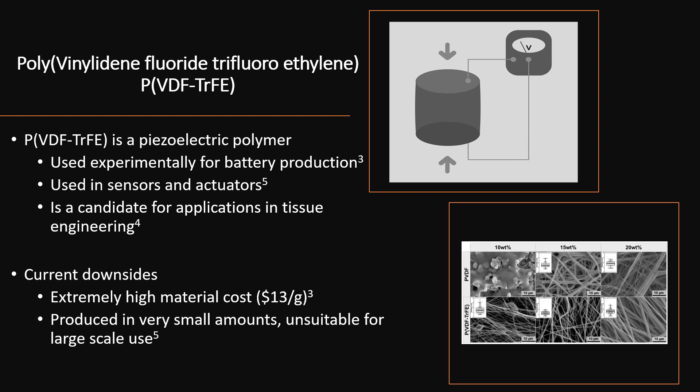There are some downsides with this polymer, such as its extremely high material cost. Right now it costs about $13 a gram, and it's also sold by the gram, which makes it unsuitable for, for example, electric vehicle production. So we designed a process to solve these downsides mentioned previously.

Our process aims to produce 300,000 pounds per year of 70/30 PVDF-TrFE in both film and powder forms, with the objective of supplying the demand in battery market materials for electric vehicles and medical research needs, with the end goal of reducing current market price for the product and increasing supply.

Now, the way we did this is we developed a commercial process design by upscaling a current laboratory procedure, which also includes process safety and controls. Now, in the next section, we're going to briefly walk you through the chemistry involved in the process of synthesizing this polymer with Mohammed.

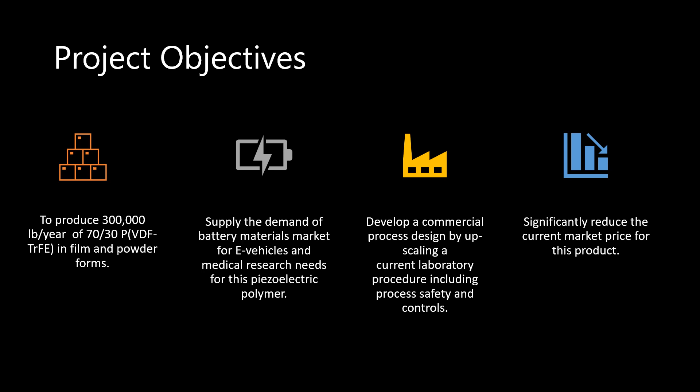So let's go ahead and take a deeper dive into the production chemistry of PVDF-TrFE from vinylidene fluoride and trifluoroethylene. The first step involves the reaction between VDF and TrFE in the presence of calcium hydroxide and ethyl hydroxyethyl ether, which in our case is our commercial Bermocoll, as a stabilizer. This process will be our copolymerization and will result in the formation of a copolymer of both VDF and TrFE.

The copolymerization reaction can be initiated by various methods, such as chemical initiators, radiation, or heat. In this case, our calcium hydroxide will act as a base to initiate the reaction between VDF and TrFE, while our Bermocoll just stabilizes the resulting copolymer. Our calcium hydroxide will not be a typical initiator in the sense that it will not form any free radicals or any other reactive species that initiate the reaction.

However, what calcium hydroxide will do is initiate the copolymerization reaction between both VDF and TrFE by deprotonating the acidic hydrogen atoms on the carbon atoms of VDF and TrFE monomers. This reaction will generate carbanions, which are highly unstable, and they will attack the electrophilic double bond of the neighboring monomer, leading to chain growth and propagation.

The use of calcium hydroxide as a base initiator is a common method for initiating polymerization for reactions that usually involve monomers with acidic hydrogen atoms, such as in our case VDF and TrFE. The next step will be the functionalization of the copolymer using ethyl chloroformate and diethyl carbonate. The ethyl chloroformate will react with the hydroxyl groups present in the Bermocoll to form carbamates, which will act as nucleophiles. These nucleophiles will attack the carbonyl groups of the diethyl carbonate, resulting in the formation of ester linkages between the Bermocoll and the copolymer.

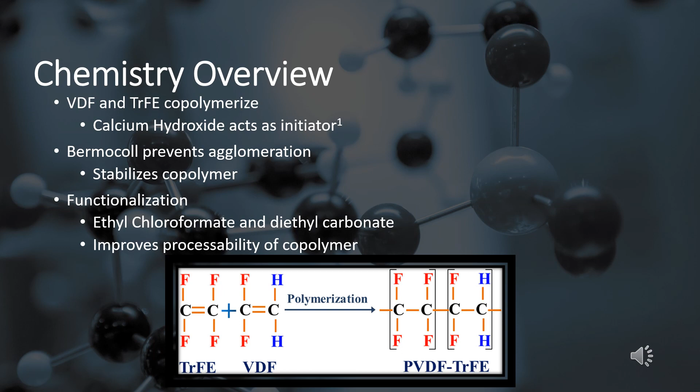The resulting polymer becomes more compatible with solvents and other materials. As a result, this functionalized polymer is more soluble in a wider range of solvents and can be processed into various forms more easily, which will assist us in our final endeavors before commercializing. I'll walk us through the process overview.

Alright, here's our overall plant breakdown of the processes involved to produce this polymer. The raw materials include demineralized water and go into copolymerization in a reactor, and tower water is supplied to that reactor for temperature control. The crude product enters the diafiltration system along with demineralized water to remove impurities from the product. Then the product leaves the diafiltration process and flows through a dryer with compressed air to remove moisture. The product at that point will have 99.9% purity and become a solid cake.

After purifying, this cake product will be milled to produce PVDF-TrFE powder, and 10% of that powder will be transferred to an extruder to produce PVDF-TrFE film. The waste involved from all these processes will be discussed as we go into details through the equipment used in each process on the following slides.

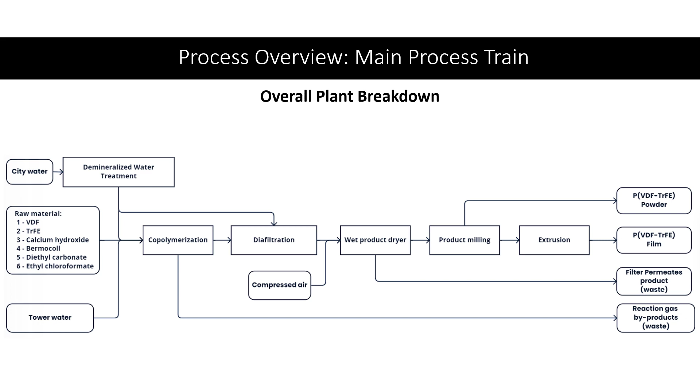There are four main sections in the plant. In blue is the demineralized water system, where demineralized water is produced to supply the synthesis section in purple and the purification section in green. In purple is the synthesis section where the crude product exits as a slurry, in green the purification section where the slurry is washed and dried, and finally in orange the solid processing section where we turn the product into powder and film.

And here is a fluid flow demonstration. The raw material enters the jacketed reactor 2 and yields 90% PVDF-TrFE. Then the crude product, which is a slurry, will go to diafiltration where it will be washed 7 times to produce 99.9% pure product. The fluid then will be transported to a dryer where the moisture will be removed to prepare for milling.

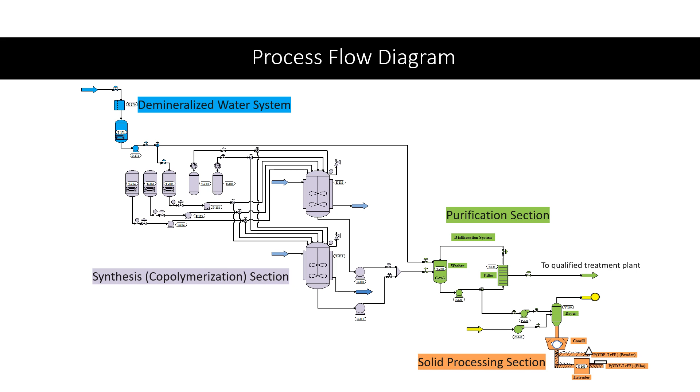And now from the dryer to the co-mill, the product will become powder. 10% of that powder will be transferred via conveyor belts to an extruder to produce the films from this product. Let's take a closer look at each section.

This section of the plant includes a unit that is pre-built and fully equipped with the necessary equipment to produce demineralized water from city water. The unit can produce up to 10 gallons per minute, which is stored in an intermediate tank to supply the DI water as a solvent for the reactor, and the very large amount required for the diafiltration system. The DI water is pumped using a centrifugal pump, and a possible improvement for this section of the plant is to have another tank for the diafiltration system in case of producing much larger quantities than currently issued.

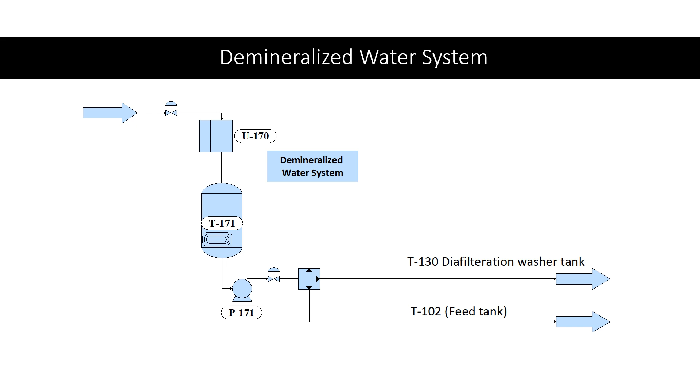Let's talk about the synthesis section. There are 3 tanks containing the reagents along with the demineralized water, the solvent. These tanks have heating coils inside of them, whose purpose is to heat the reagents and the solvent to 105 Fahrenheit prior to feeding the reactors. One of the tanks will be fed demineralized water from the demineralized water system, the blue arrow.

That raw material tank will contain calcium hydroxide and Bermocoll, as these two materials are solids and there are no significant hazards from mixing them with demineralized water prior to feeding into the reactors. In addition to that, the reactors cannot be opened to pour these solid materials, as the reactor needs to be pressurized to complete the reaction.

Along with these tanks, we have two gas phase reactants, VDF and TrFE. The pressure of these feed gas canisters is controlled using regulators installed and rated for the reaction requirement. The raw materials will enter one of the two jacketed continuously stirred batch reactors. The reaction takes around 3 hours to complete, and the reactors will operate staggered in 1.5 hour phases to reduce downtime in the purification section and have a semi-continuous process.

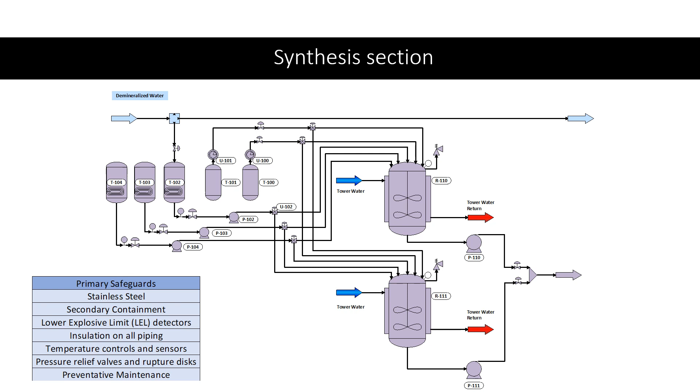The jacket around these reactors will be filled with tower water to control the reactor temperature, as we previously mentioned that the reaction is extremely exothermic, and the temperature can reach around 70 Celsius. Also, the reactors are designed to withstand over 1000 psig, as the laboratory procedure mentioned events of high pressure during the copolymerization. The crude product will be a slurry and will be pumped to the purification section. The primary safeguards like temperature control and sensors are listed on the left.

I will be discussing the purification section of the plant. Once the crude product comes out of the reactor, it will be sent to a diafiltration system where we'll be purifying our product to remove all the impurities. The system consists of a washer tank equipped with a mixer. The fluid is pumped using a positive displacement pump, as the fluid will become viscous at this stage of the process due to the nature of the polymer in water, along with the dispersion of Bermocoll.

The solvent used is DI water, supplied from the DI water system that we talked about earlier. An amount equal to the crude product is fed to the system. However, the total amount added is equal to 7 times the amount of crude product. This will dissolve the impurities, including the calcium hydroxide and other materials that participated in the reaction.

The mixture will then be transported to an ultrafiltration membrane to separate the dissolved impurities, along with a considerable amount of DI water, as the permeate fluid, and the pure product will remain in the retentate, which will flow back to the washer tank with a fresh batch of DI water. This process will have 7 washing cycles to obtain a 99.9% pure PVDF-TrFE polymer.

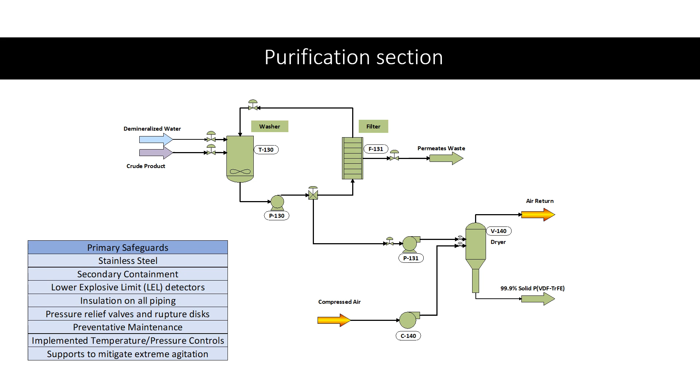Moving on to the solid processing section. So exiting the dryer, as we said earlier, is a 99.9% pure solid PVDF-TrFE copolymer agglomerate. And this agglomerate, the dried copolymer, will be sent to the conical mill via conveyor belt. The conical mill will mill the solid copolymer to achieve the deagglomeration and the particle size reduction in order to later extrude this powder into a film.

The co-mill will have a wide selection of screen sizes and rotor configurations, which will enable us to achieve the desired particle size distribution. The time to mill the 51-pound batch of dried copolymer will be approximately 15 minutes. 90% of this milled powder product will be sent via powder bins on a conveyor belt to be stored as a final product, while 10% of the milled powder will be conveyed to a film extruder.

When the milled powder is fed into the extruder, which as you can see is the last unit operation in the plant, it is melted through a heated barrel and then subjected to high pressure and shear forces, which will homogenize the material. The molten polymer is then directed through a narrow die, which will shape the polymer into a thin film. And the film is finally quenched and solidified and then cut into sheets as the final product. This extrusion process will take approximately 15 minutes to complete.

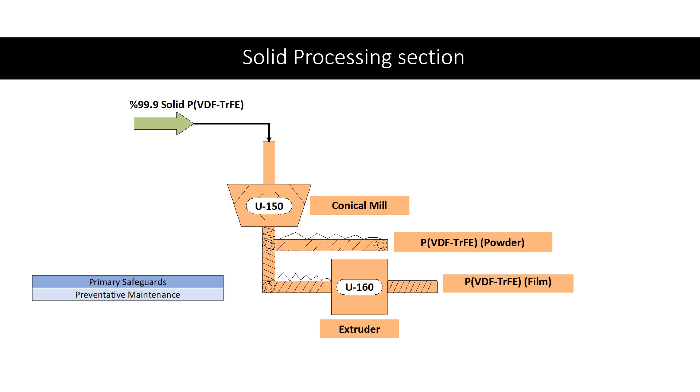And now we'll be talking about process safety, which will be introduced by Muhammad. So the table below showcases a summary of the compounds used alongside their respective health, fire, and reactivity hazards. The team conducted a process hazard analysis, or PHA, utilizing the what-if methodology to guide the implementation of any controls and safeguards. The controls and safeguards were showcased during each respective section as seen beforehand. The biggest open point as a result of this what-if analysis was the quantification of the amount of byproducts, both gaseous and liquid, formed as a result of the reaction. We will go more in depth on that avenue in the environmental performance section.

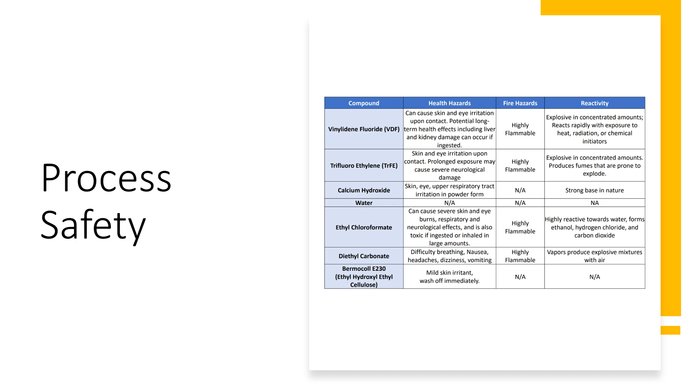As far as other recommendations go, the team recommends the application of a secondary temperature control system in both the reactor and the dryer. What we believe this will do is serve as an additional layer of protection against subtle spikes in temperature that may introduce a risk of fire or explosion. This will also be compounded with the safety factor that would come alongside a better understanding of the kinetics of the actual reaction. The team will also recommend the implementation of external protective barriers around pipes and areas of potential physical external damage. Finally, a robust preventative maintenance plan will be implemented for each node in the plant. The maintenance plan is to be performed consistently as well as timely.

A closer look at the environmental performance of our process. The biggest open points as far as environmental performance is concerned are the release of trace amounts of diethyl carbonate as well as ethyl chloroformate. The team found out that ethyl chloroformate decomposes in the presence of sunlight to produce acid fumes, while diethyl carbonate still remains an open point. The team has been considering the use of flares, or small-scale flares, in order to break down diethyl carbonate. This will also break down ethyl chloroformate, as they both break down in the presence of heat.

The table on the top also showcases the effect on water life if exposed to any of the chemicals. That, as well as the waste stream analysis, was pulled from an estimate derived from ChemCAD and remains as is, a very rough estimate. A further analysis is recommended in order to determine a better approximation of the impact. But as it currently remains, there is a low contribution of the waste stream towards environmental impact for water as well as global warming, smog formation, and acid rain.

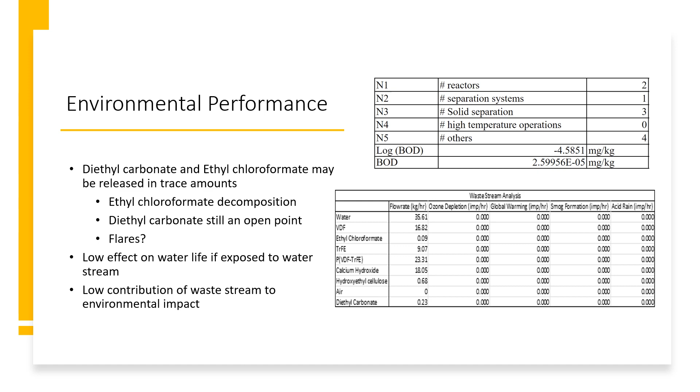Here is a summary of all the other regulations considered so far. The biggest regulation that led to a safety recommendation can be showcased in section 1503.2 of the Greater Cincinnati MSD regulation. This led to the installation of lower explosive limit, or LEL, sensors for the detection of volatile compounds. This proved a crucial safeguard for operators and the process, and its impact was evaluated and can be showcased in our PHA report.

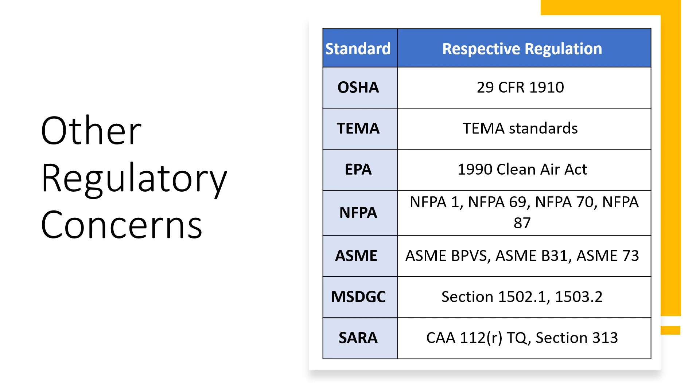So regarding the significant technology risks, the primary risk associated with this project is the adaptation and scale-up of a lab polymerization procedure. We don't have a perfect understanding of the kinetics of the reaction, but the synthesis of the PVDF-TrFE is currently only done at a laboratory scale, as far as we know. Thus, scaling it up and producing hundreds of thousands of pounds per year of the material has never been done before, and there's definitely some risk that it would not react as anticipated.

Scaling up the reaction may also change the kinetics, which may affect the reaction conditions and the expected yield. So to mitigate this risk, pilot trials for this synthesis should be completed before scale construction begins. Another technology risk entails the availability of TrFE, trifluoroethylene. The process requires about 120,000 pounds per year of the material, and it's not a very common chemical reagent. The risks are not having enough raw material or paying a premium on TrFE once full operation is achieved.

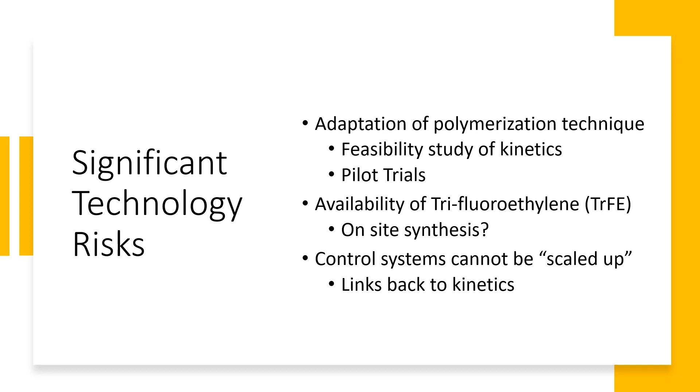The risk can be mitigated by synthesizing TrFE on site, via dehalogenation of chlorotrifluoroethylene, which is less expensive and more available. And finally, adapting the lab procedure also entails a new control system. The control system includes reagent injection, timed reagent and initiator additions, and product removal. Running the reaction at such a high pressure also means a consideration needs to be made for the relief system and what tolerances are allowed by the reaction kinetics.

So now we come to the process economics. Our design is intended for us to sell the two forms of the PVDF-TrFE. The powder is sold at 8 cents a gram, which is significantly better than the $13 a gram as mentioned in our intro. And the film is marketed to be sold at 50 cents per gram. Now the estimated revenue from this in total is $16.6 million a year.

Using the individual factors method, as explained in the textbook, our capital costs are estimated at about $8.9 million. And the breakdown of that can be seen in the table, with our total bare module cost at $2.7 million, our total permanent investment at $6.9 million, and our working capital at $2 million.

Now our expenses are topped by our raw material expenses at $3.7 million. We designed this process to use as few utilities as possible, so our utilities actually come out to around $40,000 a year. Operational cost is another $2 million, and then all other expenses totaled is about $3.8 million.

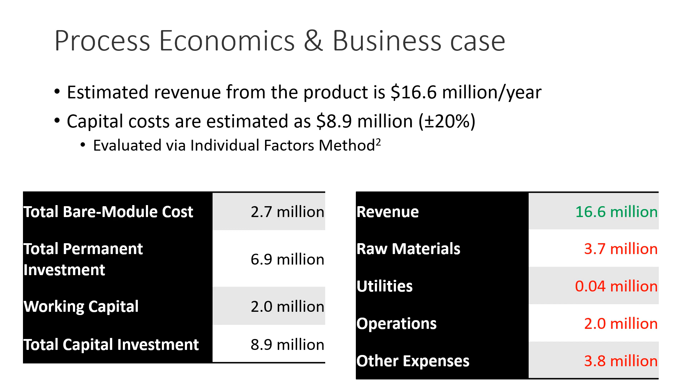So the profits earned from this design post-tax come out to about $4.3 million per year, which equals a return on investment of about 48%. So based on expected sales, expenses, and capital costs, this project is expected to be profitable and is recommended for that reason.

Now, other metrics of profitability we can showcase are venture profit, which is about $2.3 million. This whole project is expected to have a payback period of about 1.3 years, which means the initial capital investment will be paid back in less than 1.5 years. The net present value over the course of its 10-year life, with a 15% discount, is about $10.5 million. And the investor's rate of return comes out to about 36.6%.

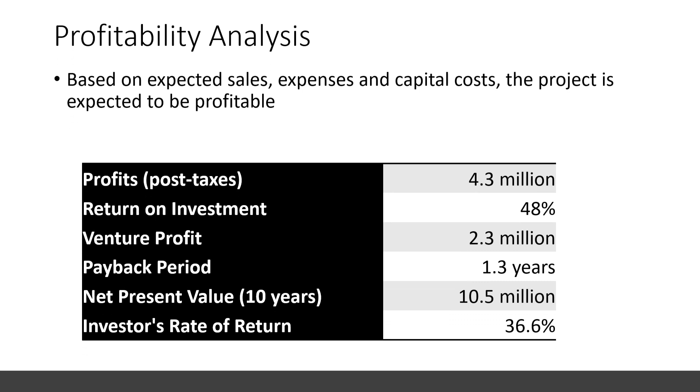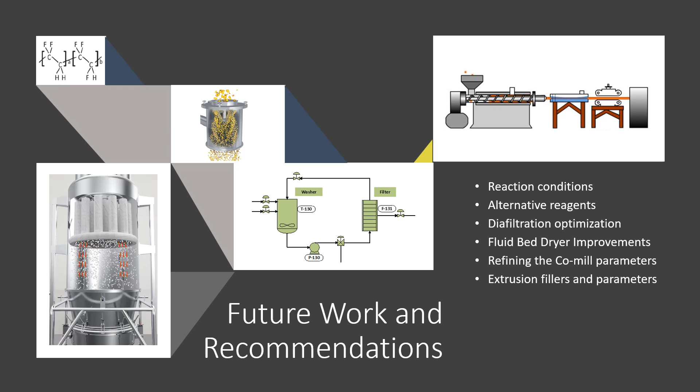And the extrusion process can focus on optimizing the parameters, such as evaluating the effect of incorporating additives or fillers, and understanding the impact of different cooling methods on film properties. Things like this for the extrusion process can improve the properties of the polymer, such as the mechanical strength, thermal stability, electrical conductivity and piezoelectricity.